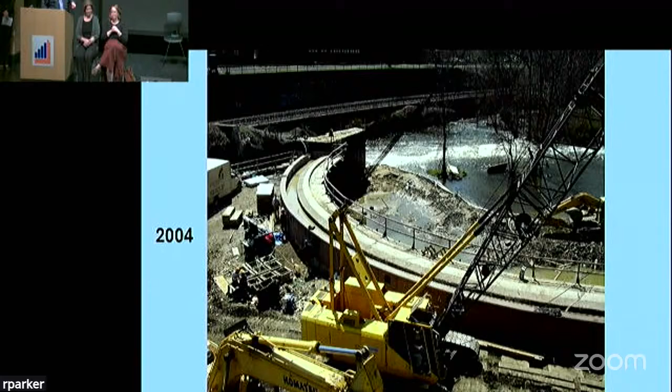This is not working, Rand. Monroe Falls, anyone from Monroe Falls? Mayor's here, thank you. So Summit County, Monroe Falls, and Ohio EPA partnered to get this structure out.

Initially, it was only supposed to be removed half, and there was going to be a fish way to go around it. Well, the good thing was - and I don't know if it was good or not, it was good for us - the river dropped down into the historic channel it was in 200 years before that structure was first constructed. The mayor at the time was not very happy because he thought he'd still have his dam pool, and he said, you might as well take the whole thing out. I'm like, okay. So we had to go back to the beginning, but what an achievement.

Now from above Kent through Monroe Falls we have businesses that allow people to be on that river enjoying a healthy, clean Cuyahoga River. That's pretty amazing. Up, up, up.

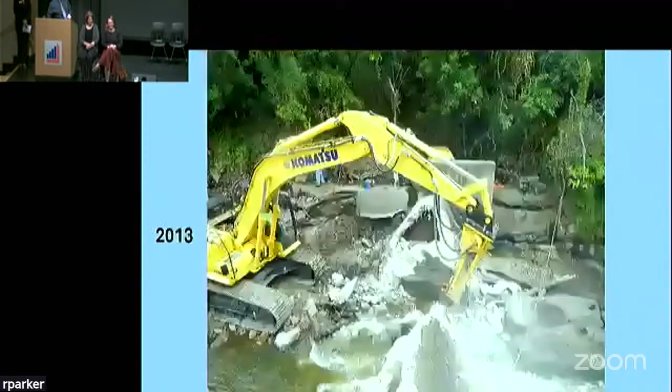Go back one, Ramsey, please - Cuyahoga Falls. Who walked and saw some of that? That was cool, wasn't it? The dam cam was the bomb. So we are hopefully going to have a dam cam somewhere because we've all talked about that. That was crucial to this project going forward - in fact, that might have been the most important part of the Cuyahoga Gorge project.

But we had two structures that were removed, and look what happened. We started in 2013, and by 2016 we now have recreation celebrating a free-flowing river, albeit a little more challenging than you'd normally have for a canoe ride. It's another opportunity on the Cuyahoga River, which is a water trail.

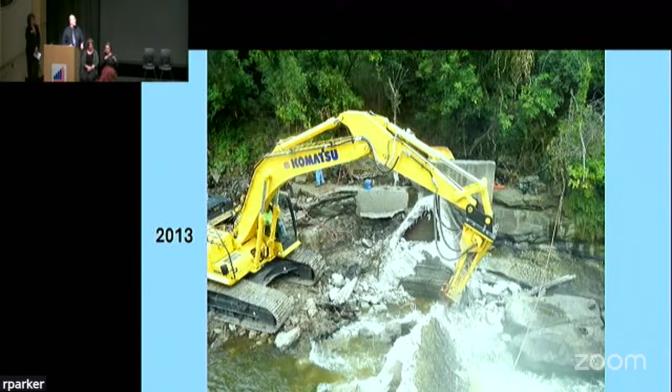The Canal Diversion Dam - COVID did not stop this. So Friends of the Crooked River, raise your hands. Thank you so much. This group took on project management. Now, I must admit, it was probably my fault selling it to them that it wouldn't be that hard.

I think they would disagree at this point. However, what a collaboration - a group of citizens wanting a cleaner Cuyahoga, managing a project funded and sponsored by the federal government, the state government, and the city of Akron. Now this section of river in our new water quality standards is being upgraded from our normal, which we call warm water habitat, to exceptional. That means it's going to hang with the cool kids like the Grand River in being that good, because of recovery.

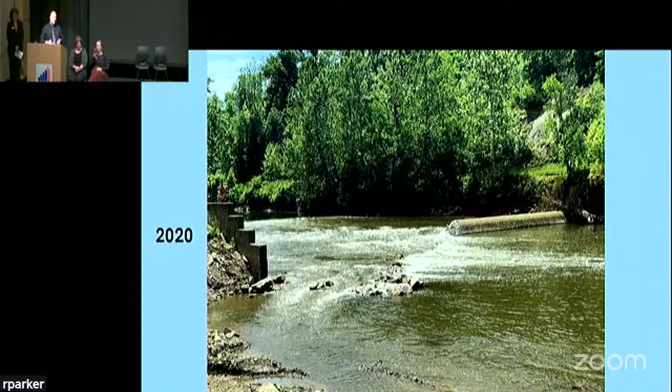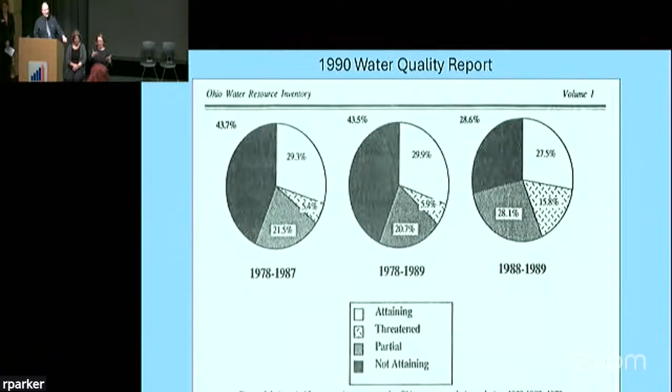Oh, Ramsey, go back one more. Okay, go forward one more.

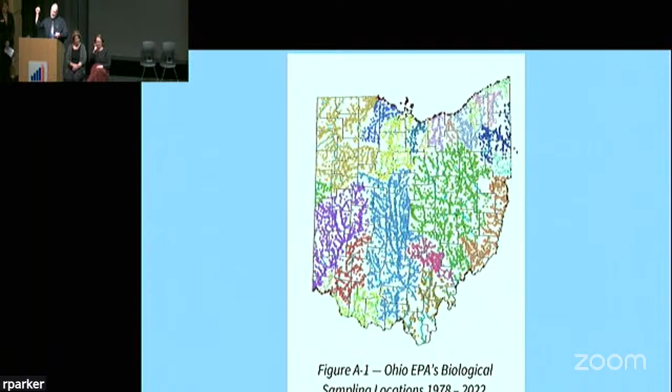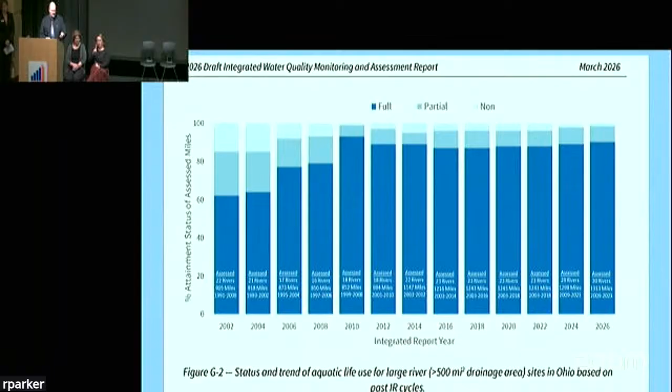So let's look at a longer story - go back at the large rivers. Look how much they have improved. What we're seeing in the large rivers is dramatic improvement because we're making things better: chemistry, dam removals. These are streams over 500 square miles of drainage - the Cuyahoga River in its entirety is over 500 square miles, and at the point of the Gorge Dam, that river is 336 miles of drainage. If we look at the smaller streams, what it basically says is our smaller streams are getting better, but not at the same rate as our large streams.

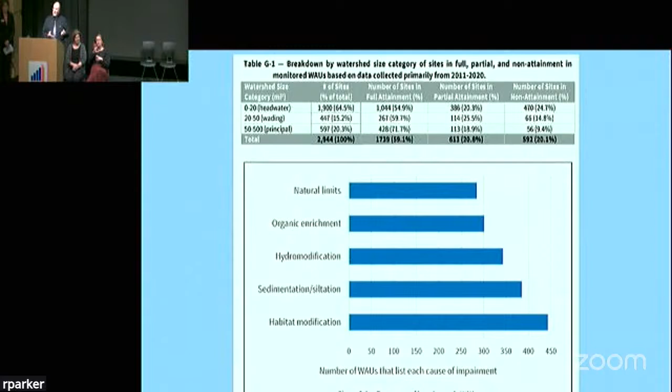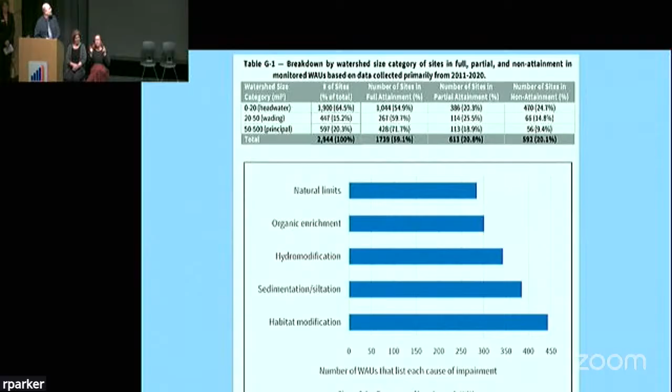And why is that? Habitat modification. Included in habitat modification are dams. So what we're going to talk about today is it's happening, and we're going to go forward and look to what we're going to have. So I am done. Boom. You're up.

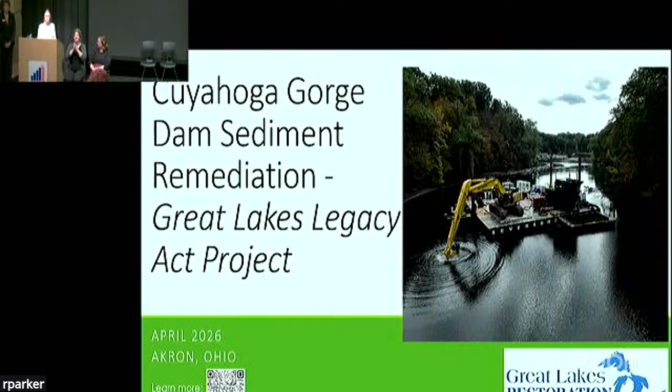And as Bill went over, the benefits of having the dam removed are obvious.

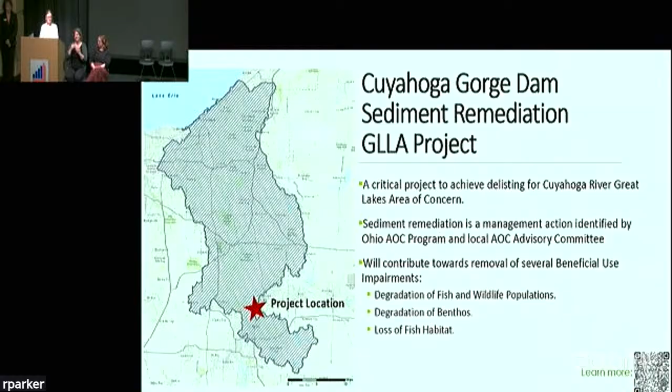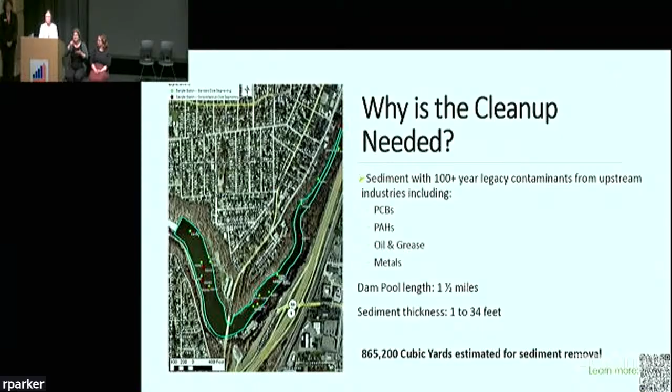Once the group came together and decided that before we can remove the dam, we need to remove this sediment, there needed to be some sampling done. So in different phases of the project design, the remedial investigation, they went out and sampled different areas within the dam pool to identify whether or not contaminants were present, and then once identified that they were present, what was the extent or area they were located in.

The dam pool goes from the dam itself up through upstream areas. The area being dredged is about 1.5 miles. It goes up to, if folks know where the American Legion is in Cuyahoga Falls, that's the land side point of where the dredging will occur.

So the sampling identified where exactly the dredging would need to take place, and the sediment samples also identified what types of contaminants were present - that's where they identified the PCBs, the PAHs, oil and grease, as well as heavy metals.

It's really important to mention the contaminant levels present within the dam pool are low-level contaminants. That's fortunate because there are other regulatory programs that come into play when there are higher contaminant levels - you have TSCA and RCRA regulatory programs that can cost more money and more time. So it's really beneficial that while contaminants are present, they're at least at lower levels. They still need to be properly handled and disposed of properly, and that's what we're going to be discussing today.

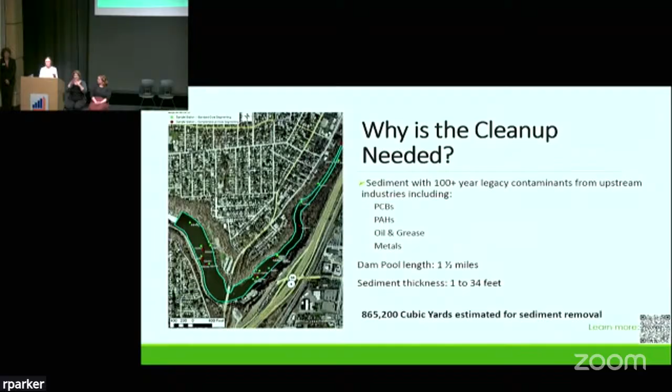Just a couple other things to note about the dam pool itself: throughout it there's varying levels of water present as well as sediment present. The actual sediment that needs to be dredged varies anywhere between 1 to 34 feet, and there's nearly 900,000 cubic yards that needs to be dredged. This has been quoted in the past, so hopefully it's correct: that volume is about 13 football fields filled to the goalposts. So it's a lot of sediment.

Just following along here. Yeah, thanks, Ramsey.

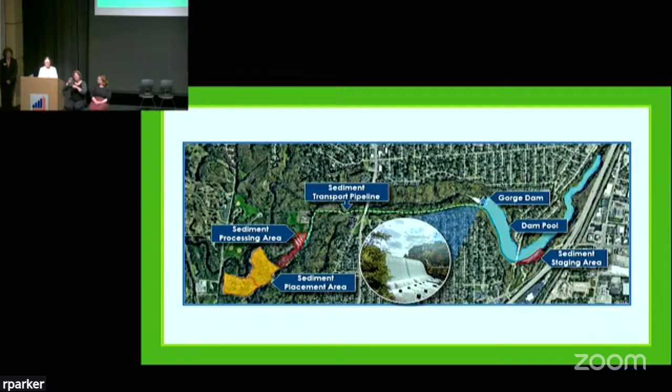It's important to mention this project wouldn't be here, I think it's been said a couple times from the previous presenters, without the efforts from local, state, and federal partners. A lot of meetings, planning, design, and tough conversations needed to be had to make it to today, to be able to celebrate the progress being made. The overall construction contract award was just over $130 million. It's a big dollar sign, but that was a lot of sediment, so they go hand in hand.

This project is funded through the Great Lakes Restoration Initiative. That's the federal portion. But the non-federal sponsors, or our partners, they also provided contributions.

Underneath the Great Lakes Legacy Act, going back to that area of concern I had mentioned, there's a Great Lakes Legacy Act program. In order for a project to qualify, it needs to be within the area of concern. Underneath that act, we have project agreements with the non-federal sponsors listed here: Ohio EPA, City of Akron, Northeast Ohio Regional Sewer District, as well as First Energy Ohio Edison. They are signatories of that project agreement and have agreed to provide cash and in-kind contributions that make this project possible.

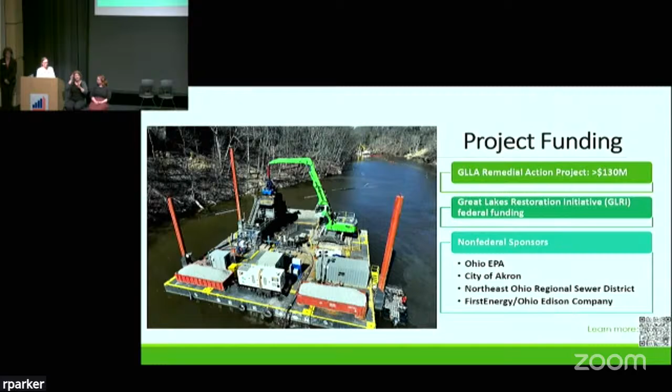Just key emphasis on the partners - we wouldn't be here if it wasn't for the local, state, and industry partners coming together to make this project happen. There are other partners we work with, including Summit Metro Parks, that have supported this project throughout the years and continue to do so, as well as Ohio Lake Erie Commission, the City of Cuyahoga Falls, and Summit County, who have all provided either cash or in-kind contributions. We also have the U.S. Army Corps of Engineers supporting the project. So lots of folks involved in order to get the project where it is today.

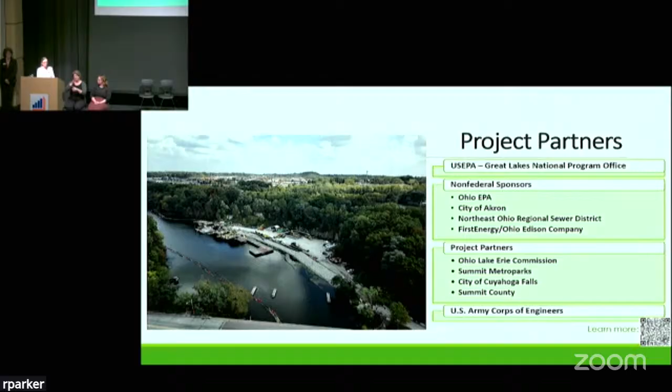This slide is just showing - feel free to take a picture of the QR codes on there. We have a link to the Cuyahoga River area of concern, as well as a link to the EPA Cuyahoga Gorge Dam website. We post pictures regularly with status updates on what's occurring on site.

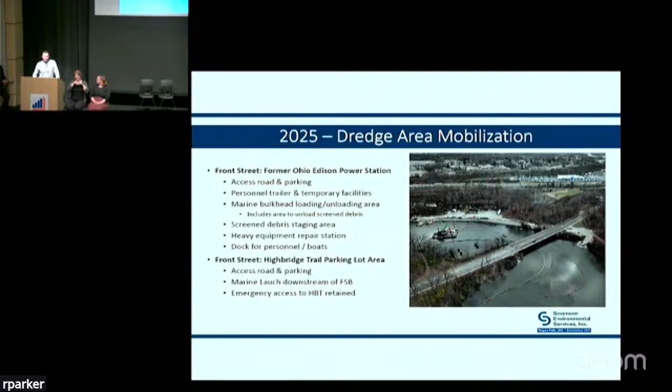On the other side, a much smaller area is the High Bridge Trail parking lot. High Bridge Trail extends right off of that, so we made sure to leave that access open for emergencies, park personnel, dam personnel, and First Energy for the power lines there. That was important, working with the project partners on that, and then mainly just parking in that area. You can see the ramp down to the river. The Front Street Bridge doesn't have enough height for us to get our big equipment through, so any work upstream of the bridge was all launched through that little ramp.

Pretty similar infrastructure down at the Peck Road site - parking, access roads, we brought in some stone. We used some of Heather's shale that she has plenty of, which was helpful. There's another mechanics work shed, another couple trailers for our offices, and our break trailer for personnel.

Right here is the water storage and treatment area. Adjacent to that, where there's a bit more water and a bigger area, is where all the dredge sediment that gets mixed with Portland cement gets pumped to when it comes from the river. Adjacent to that is the area where we store our Portland cement, where it gets stabilized into the sediment, and then trucked out into the placement cells, which are the grass areas out there.

Just wanted to mention, you can't see it on the screen, but off to the right of our staging area is the Indian signal tree. We put up safety fence around that - I know we got a question about it last year - it's still in good condition. We're never back there with any equipment, so it's still doing great.

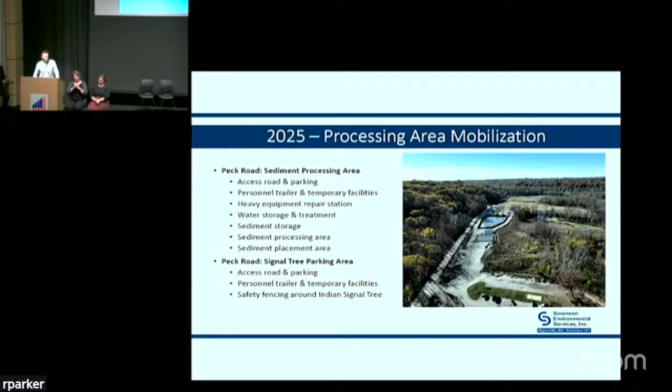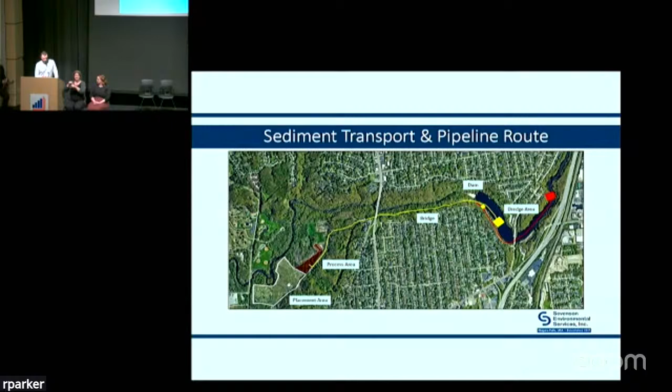This is the figure that Courtney just showed as well, just reviewing the dredge area, the pipeline down through High Bridge Trail. I'll talk about the bridge in a second, then the processing and placement areas. So again, just an overview before we get into a breakdown of each area.

High Bridge Trail is where all the dredge pipe is. We had a specialty contractor come in who basically only welds pipe - over 60,000 linear feet of pipe needed to be welded. We could do it ourselves, but it's a lot of pipe, so we brought them in and they were there for almost a month and a half, welding, certifying every weld, making sure nothing leaks. We did a bunch of leak tests. This was one of the more involved aspects of the project, getting this pipeline installed.

Anyone familiar with High Bridge Trail knows it's just a walking and hiking trail, so getting any heavy equipment in there is very difficult. Mix that in with the Chuckery Race in the area, the overhead power lines, the utility poles, and the dam - it was difficult. It took us almost two months from start to finish to get the pipe in and get the bridge in, which I'll show in a minute.

We had to use some specialty smaller equipment - wanted to mention this, it's called the Morooka truck. What it does is drive forward down the trail, and we literally just drag the pipe with it. When we're done, the cab of the truck spins 180 degrees so you can drive straight out. The cliff there is pretty dangerous, so we didn't want to back up and down that trail a hundred times. That worked out pretty well.

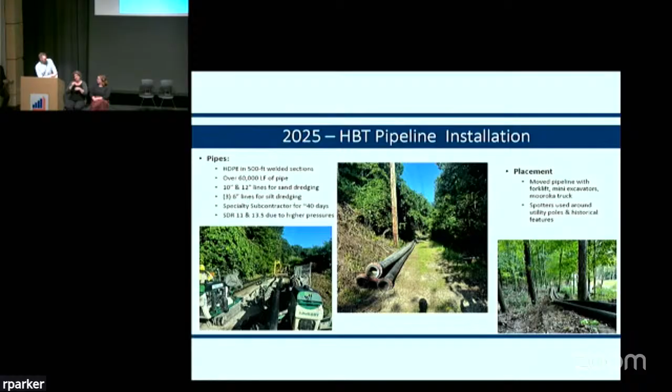Anyone familiar with the area knows there's about a 170 to 200-foot gap where there's a big ravine we had to span for our dredge pipes. We couldn't just fill in the area due to drainage and all the historical features, so we had a couple different ideas. There's a wooden walkway there that we were thinking about rebuilding. We actually brought in a couple local contractors to take a look at it, and they wanted absolutely nothing to do with it.

Some of our crazier ideas were anchors and cables, literally driving anchors into the uphill slope, securing cable to them and tying them to a couple trees to kind of float the pipe over. I don't think SMP really liked that idea, so we didn't go with that. Sheet pile was an idea, but what we ended up going with was a self-cantilever bridge, which we were able to get back there in 20-foot sections.

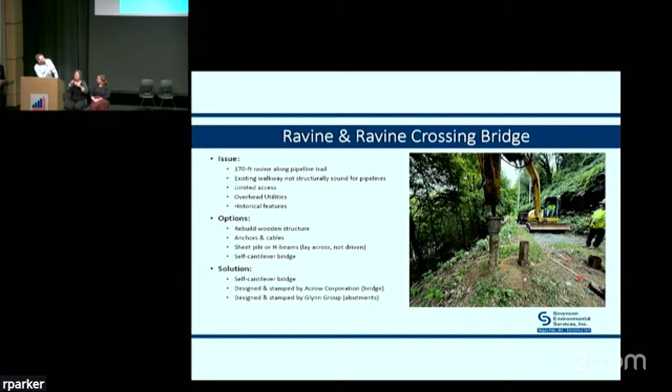It was designed by Acrow Corporation, who designed the bridge, and then we had to design the abutments as well. The Glynn Group, who we work with in Buffalo, New York, does a lot of our geotechnical engineering and actually designed the abutments. The only disturbance we did was drive pipe pile into the ground for the abutments. Those were driven into bedrock about 10 feet, and we placed crane mats on top of them for the bridge to sit on. I have a bunch of pictures.

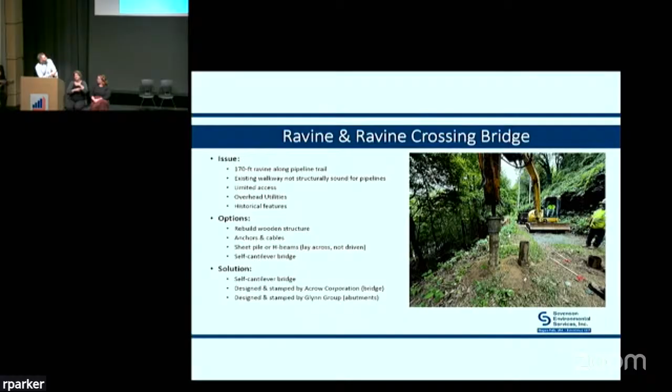The bridge itself was about 170 feet long, 10.5 feet wide total. The walkway is about 5 feet or so. You can see the bridge sat on rollers when we were installing it, and then we literally just pushed it out into the ravine, and the counterweight of the bridge itself offset it when it was pushed out. We had to build it in 20-foot sections, again just because of the access, bringing piece by piece back there.

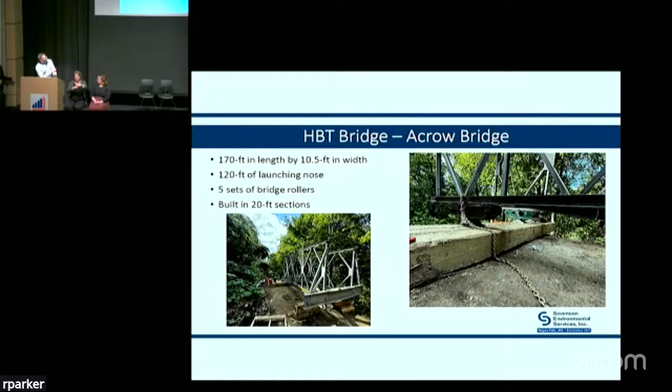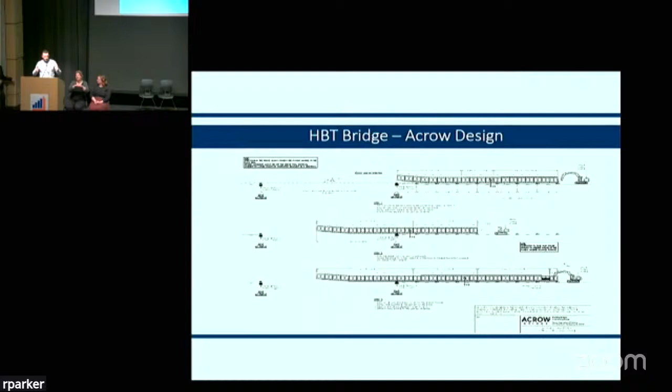Here are a couple pictures, you can go through these pretty quickly. On the left, this is us literally building it by hand, every nut and bolt screwed in by hand. On the right here, this is the cliff right here, the Chuckery Race was right here, so not a whole lot of room. We brought in a little stone to level the area, and you can see the utility pole on the other side - so kind of jammed in there.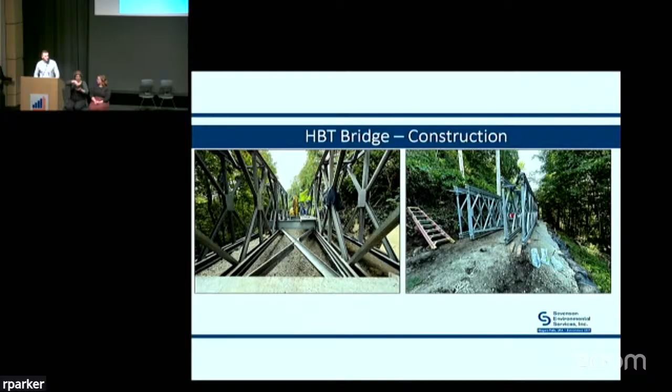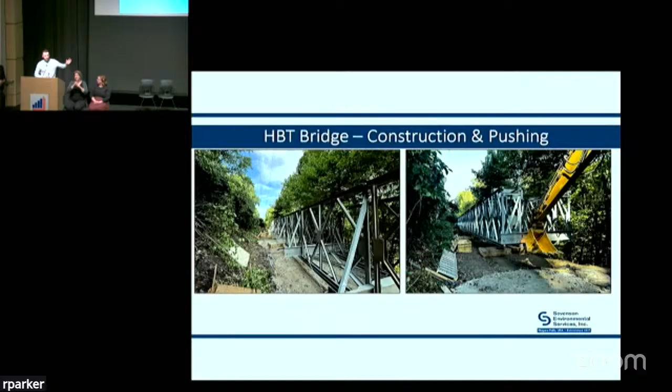We have built these bridges before, but usually with a big crane that just comes in and sets it right in. We couldn't do that with all the obstructions. Here are a couple more pictures of just building it - this is the other side, the uphill side, a little bit more room but still pretty tight. And here's our excavator literally pushing it out over the edge. So build 20 feet, push, build 20 feet, push, until it reached the other side.

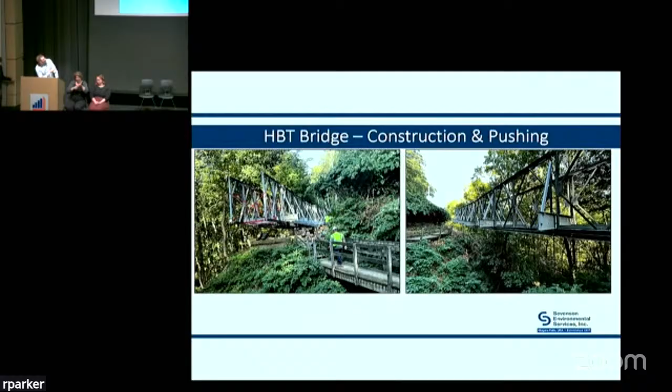Here's just a couple more - you can kind of see that launching nose angled up a little bit. Here it is going out over the ravine. This is the old walkway that I was talking about. And then here it is about to be landed on the other side. This was that other abutment that we installed the same way.

One other thing we had to do on the right side here was chip out just a little bit of existing rock just to make it fit. The height wasn't going to fit, and the width wasn't going to fit either if we didn't chip just a little bit of the existing rock. So we got that out and made sure everything was lined up correctly.

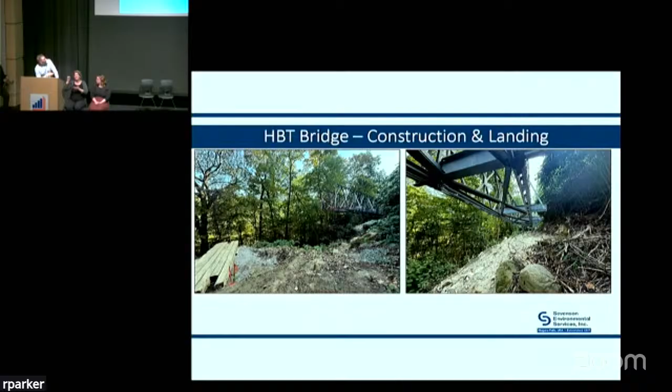Here it is landing on the other side again. This side was a little bit lower than the other side, so we made it level by placing a couple more crane mats. This picture on the left looks a little bit more dangerous than it is - we had a spotter keeping an eye on everyone, but we had to take it off exactly how we installed it. Once it hit the other side, take 20 feet off, push, 20 feet off, push. We landed right next to this utility pole.

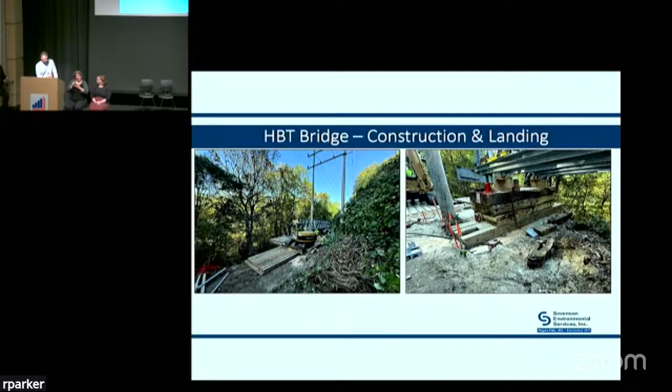This install of the bridge took us about 2.5 weeks. We were figuring more like 1.5 weeks, so it took us a little longer, but it was safely installed. Once it was in, on the right side here, we put in mats for walking, a little safety fence, and then you can see the dredge pipe being installed after everything was in.

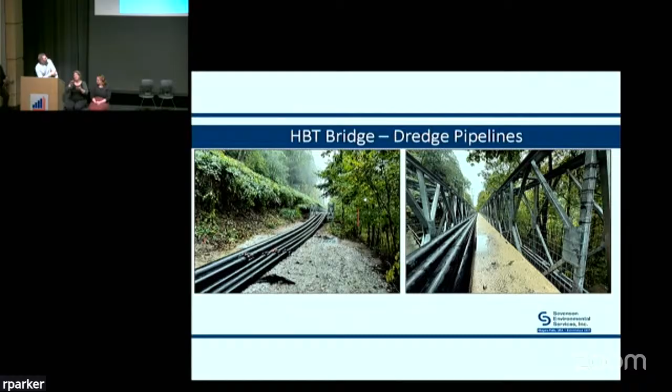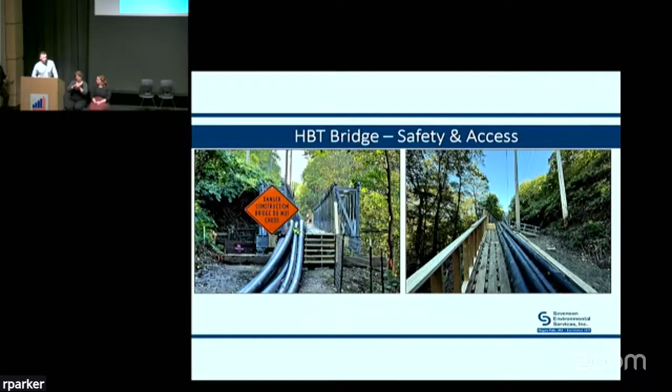And then just a couple safety signs, some stairs to get up onto the platform, and then a ramp on the other side since it was a lot steeper. The pipes were secured to one side so they wouldn't be moving around. I believe, yeah, one more picture of it from up above.

So yeah, one of the cooler things I've been a part of with this industry. It was very difficult - it took us about 2.5 weeks, and we're actually working with SMP to hopefully leave it there long term if everything works out. They have a new walkway for their trail, but we're continuing to work with everyone on that.

There's some augers in there, it gets mixed up. We're trying to add as little water as possible because on the back end, when you mix it with Portland cement, any water in there just damages the strength. So it's a little bit of a double-edged sword trying to get it to pump 2.5 miles, but also keeping as much water out of it as possible.

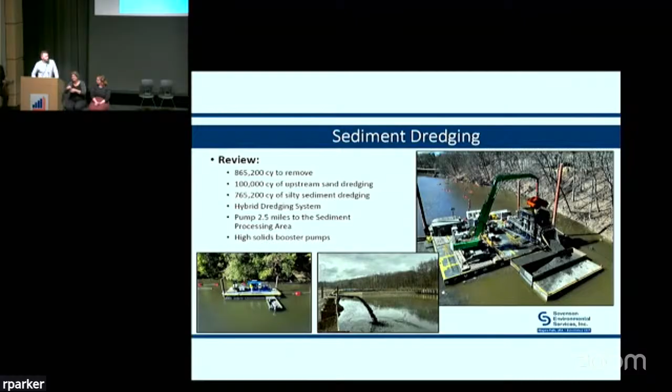All right, so what we did last year in the fall, starting with the sand, we separate them between the sand and the silt. The sand has a little bit smaller excavator dredging - it's the PC 800 Komatsu excavator.

We were able to complete about 7,500 cubic yards last year - a little less than what we wanted to in 2025, but we had to work around a rock slide that occurred in January 2025. It actually tumbled into the river a little bit, so working our way around there and dredging in that area to try not to increase the rock slide anymore slowed us down a little bit, but we were able to get past it and get up there and start dredging in the shallower area.

So you can see us loading in some sand here. This sand gets separated out separately from what's getting mixed with Portland cement currently. So adding water to this system is okay and actually helps get some of the sand into the system.

100,000 yards of this sand upriver is scheduled to be completed by the end of this year. Again, we're working our way downstream to upstream just because of how shallow it is in the area, so we have to dig our way in, get some draft, and then come back out and clean everything up.

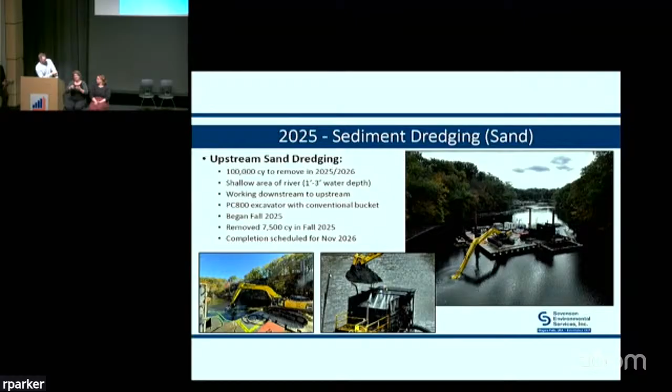So on to the silt side, in 2025 we were able to complete almost 9,000 cubic yards. We started after the sand system, so a little bigger equipment, a little bigger bucket - we were able to move a little bit more material last year. These green machines are just excavators, but we call them Sennebogens.

So last year we only had one of them dredging. This year, two of them are dredging - one's upstream of the bridge and one's downstream of the bridge. And this is scheduled to be completed at the end of next year.

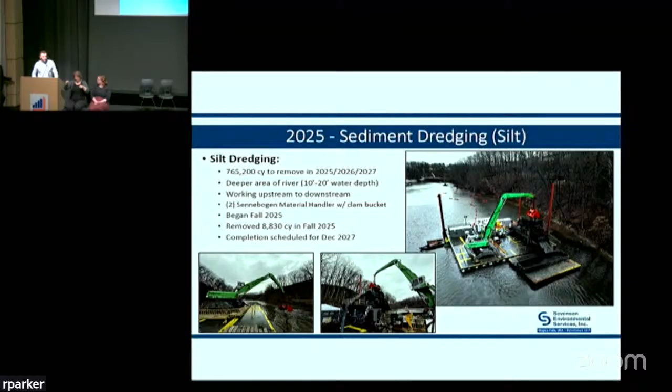All right, so what did we learn from dredging 16,000 or so yards last year? Biggest thing with the dredging is the debris. There is a ton of it. Mayor, we haven't found your bike from last year yet, but there is a lot of sticks, twigs, and leaves.

So if you see that middle picture there, that's a picture of some of the debris that came off the screen, and the leaf matting is just decomposed over years and years, and there's actually sediment mixed in with it. So there's clay, there's silt, just stuck to it, and it's hard to get it to separate, which is what we want. The way to do that is to just blast it with water. But again, we're trying not to add water, so that makes it a little difficult.

But we brought in what's called an ALLU shredding bucket, which is this top right photo here in the red. And it takes all that debris and just shreds it down to less than an inch. So it kind of slurries it a little bit before we put it into our system. We tried a couple buckets of it earlier this year, and it would just clog up our pipe and pump. So the ALLU bucket's really helping.

So we're setting up now to be able to do that full time. Once it's shredded, we're able to send it to that sand system I just talked about, as those pumps are a little bigger than the silt pumps. And there's another impeller in there that actually shreds it up even further. So any debris that comes off of any dredges now is getting sent back up to the sand barge, and that's just a lot cleaner, easier way to get it down to the sediment processing area.

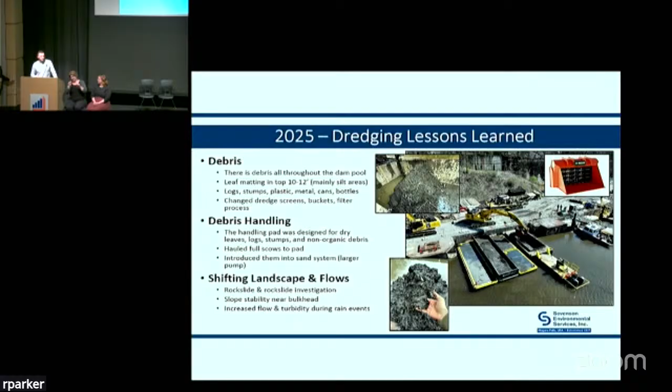And then finally, just something we noticed was just how fast the river can move when there's a lot of rain, and we've got a lot of rain this year. So just keeping an eye again on our guys' safety. We're monitoring all the turbidity. So turbidity seems to increase during rain events. So just keeping an eye on that during our quality control checks and making sure we're able to continue dredging.

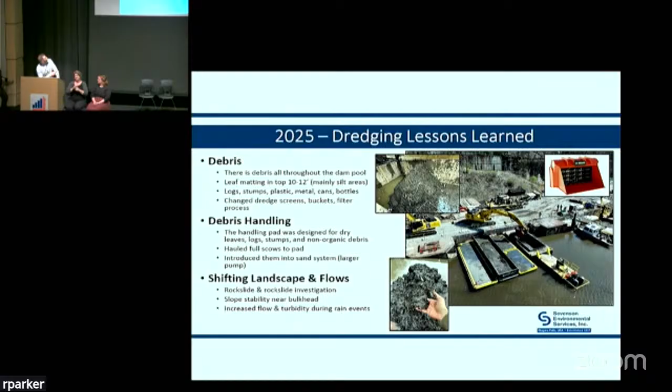All right, so that was last year. This year, with the sand dredging, we've already removed 6,000 cubic yards in the last month and a half. We did change to a larger debris screen to try and filter through some of that shredded debris that I was talking about. So that is helping. And then, still targeting the 100,000 cubic yards this year.

So as you can see, this was taken maybe a week ago. The rock slide is right in this area. So we're up past it now. We're really getting up into the shallow area. So the cycle times on the dredging should be a little quicker, should be able to get some better production and get that 100,000 yards completed this year.

For the silt dredging, we've already done about 20,000 cubic yards with just one machine. The second machine started last week. So we changed to a smaller clamshell bucket. And we haven't seen any reductions in production, which is good. We noticed when we had a bigger bucket on and just dropping all that debris onto our dredge screen, it would just clog up immediately. So trying to slow down the amount of volume that goes on the screen seems to be filtering through better and helping us with the uptime production.

We modified the layout of number 2 just a little bit based on a couple of things from last year, but we're targeting about 400,000 cubic yards between both machines for the silt dredging. That's upstream and downstream of Front Street Bridge, and that comes out to about 1,000 cubic yards a day with each machine, so 2,000 cubic yards per day, which is a lot of volume to move.

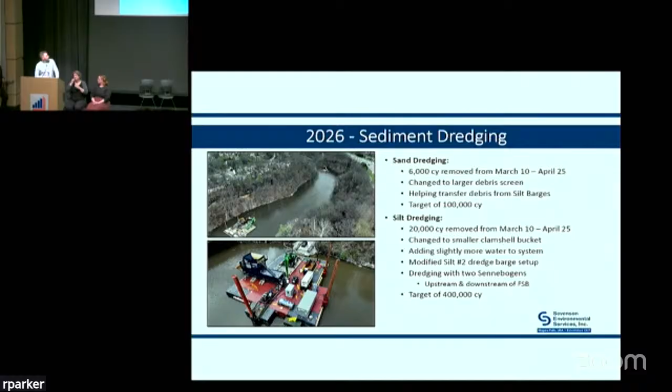All that gets dredged and pumped down to the sediment processing area, discharged into the sediment staging area, or surge basin as we also call it. From there, it gets put into what's called a pug mill. The blue silo stores all the cement, which comes in through an auger extension, mixes in with the sediment, and another auger tank mixes everything up, discharges it down, and it gets hauled out to the placement area.

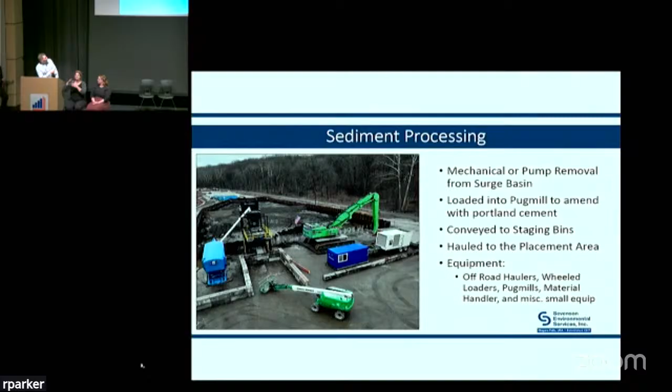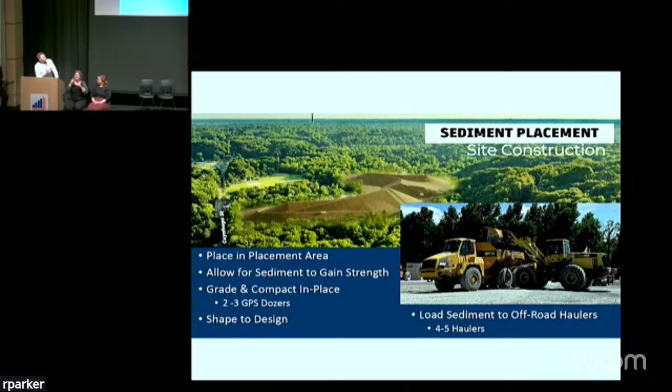Again, going through what we accomplished last year and then getting into this year, we were able to stabilize about 6,000 cubic yards in 2025.

We tested a conveyor pug mill, which was different from that photo I just showed. Obviously conveyors are more open and have a chance for the sediment to spill out the sides. With how wet it's been, we knew that wasn't going to work after testing it last year. So we changed everything over to a confined pug mill system, where it's either chutes or gravity fed instead of running it along a conveyor and having everything spill. Everything's more confined. So we learned that last year.

We were targeting about 12% Portland dosage by weight into the sediment last year. That was during no active dredging. We were able to dry out the sediment a little more during active dredging as we continue to pump water and sediment into the basin, and the percent solids and moisture content rises. So we were targeting 12% last year.

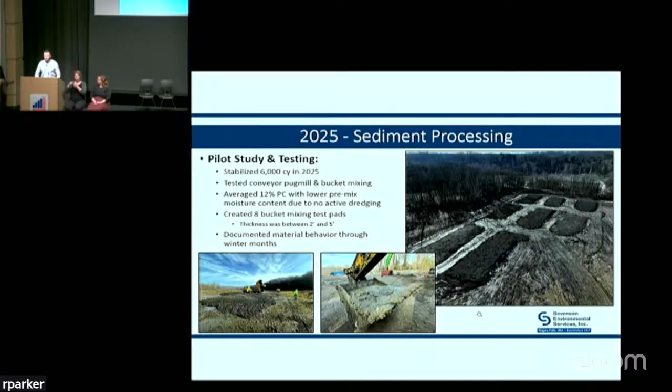We were able to create these 8 test plot areas, ranging between 2 and 5 feet thick, and we learned how it was going to react over the winter. Portland cement likes warmer temperatures to cure and set up with the sediment, so we got that done this winter and monitored how it was performing. These pictures show us dumping it out in the field, and you can see after it was mixed with Portland how thick it was. We grabbed some samples out of there to test the strength of it.

So lessons learned with 2025 sediment processing is all about moisture. There was debris with the dredging and moisture on the processing side, just trying to get as much water out of the system as we can after pumping it 2.5 miles. The moisture content ranged from 185 to 200%.

So we made a change to the surge basin here. We added this berm into the system, which keeps sediment down closer to the pug mill processing area. This allows it to drop out while the water can flow off the back into this smaller pit, and from there we pump it into our water treatment plant. Again, we're just trying anything we can to get as much moisture out of the sediment before it's introduced to the Portland.

We talked about the enclosed Pug Mill mixing and then transportation. As Courtney mentioned, it's an old dumping site. There's debris everywhere down here as well. There's soft spots, and the rain hasn't helped. So it's been tough to try and truck it out to the placement areas.

So we tested a pump last week to just pump it from the moment it gets injected with Portland out to the placement cell. That test went well last week. So we're moving ahead to get a more permanent pump out here to be able to pump that along with truck it, so we have the option to do either.

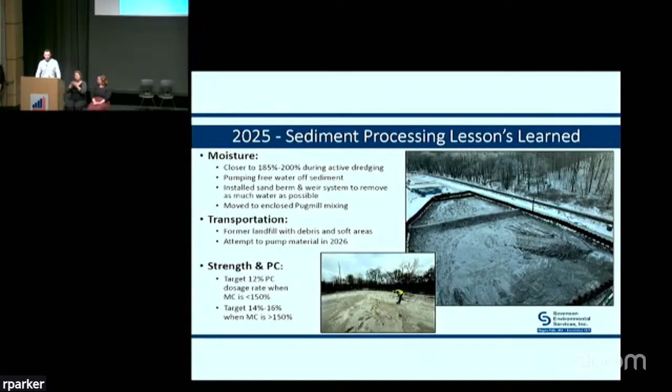This year we have also already stabilized 6,500 cubic yards in the last month. We're still in the pilot study, so again, as I mentioned, we're just constantly learning more about the moisture, more about the Portland dosage.

So we've dredged 20,000 yards, so a lot of it's still in that basin. And we're targeting 30,000 for a pilot study. Once we get that completed, we could talk with EPA, the project engineer, and come up with the final game plan to move forward with stabilizing the rest of the cubic yardage. But that should be completed in about a month or so, and we'll have a lot of good data with all the Portland and strength by then.

The production down here is scheduled to start after the pilot's done, so hoping to roll right into that. It goes until really the cold weather sets in, so hopefully Christmas if we're lucky. But there are some temperature restrictions on the stabilization. As I mentioned, Portland doesn't like the cold weather.

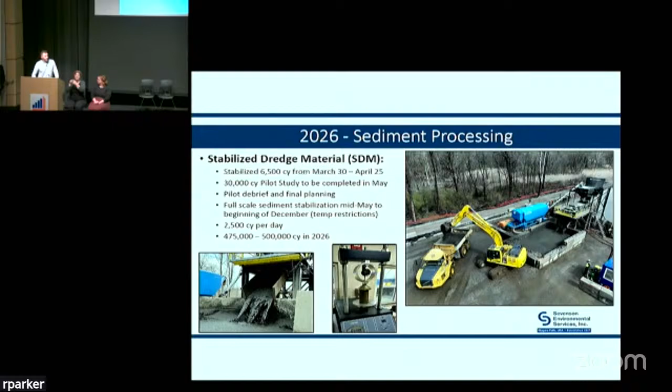So we're targeting 500,000 cubic yards this year. That's about 2,500 cubic yards a day, a little bit more than the dredging, to be able to keep up with that material in the basin. So yeah, that's the goal this year, and then obviously finish the rest in '27, '28.

All right, so some of the work monitoring, quality control - I think I shared the same or a similar slide last year, but just wanted to touch on the continued coordination with local stakeholders, our infrastructure monitoring plan. So we're just monitoring everything on the site: the Front Street Bridge, the dam itself, the bulkhead, some utilities we're monitoring, the Chuckery Race. There's a lot of them.

So everything's installed now. We actually got some pretty good data over the winter on the Front Street Bridge. Talking with Summit County engineers, we actually installed a couple more monitors. So nothing's moving or anything, but just to be cautious, we added a couple more monitors. So again, just working with local stakeholders and trying to get the best data that we can.

All our equipment out on the water has GPS capabilities, so the operators at all times know where their bucket is, what elevation they're at, what elevation they need to get to finish dredging. All that's tracked on a computer right in the cab of their machine, so they know exactly where they're digging. So we compare that with the hydrographic survey - here's a picture of our survey boat. That kind of quality controls what our GPS is saying, because obviously GPS isn't 100% accurate all the time.

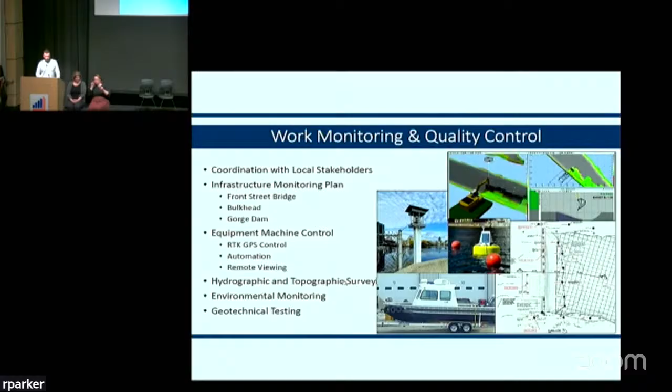All right, schedule. So we completed mobilization last year. Everything's set up. We began dredging and system shakeout as we went through in the fall of last year. And now it is time for the full production dredging with 3 operations, so that will be ongoing all this year, all of next year. The goal is to complete dredging December 2027.

Pending any additional dredging, which may be anything that flowed in from upstream, or if there's a little fluff layer left at the bottom that we have to get, but we should be done by the end of next year. And then all of 2028 to finish the placement area, make sure that's all graded, get it covered.

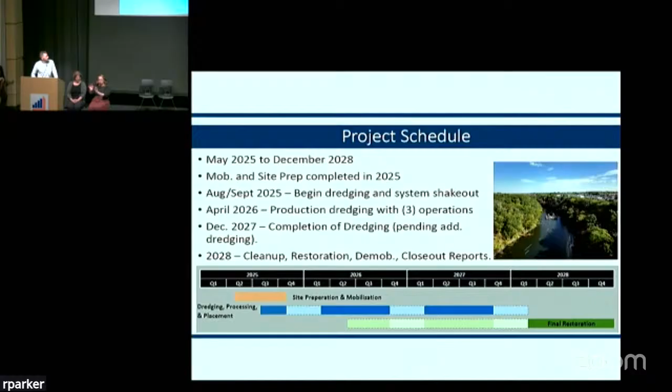Courtney mentioned the native seed. Get that established with the cover crop and make sure everything's growing, no erosion, stuff like that. All of 2028 and hopefully out of here at the end.

Work hours, public impact. So work hours are 12 hours a day, 6 days a week. Sundays are reserved for maintenance, so we have some small crews come and fix the equipment, do some services, stuff like that, so we can continue to run and stay on schedule.

We mentioned the dredging between March and December with the winter shutdown due to the Portland cement. So this year it was January to March, just with the temperatures. So probably plan on that again this year.

And then some of the other monitoring that we're doing - air monitoring, dust mitigation - we haven't had any issues with dust so far, which is good. But we have a full-time water truck on the site to wet down the roads if there is any issue with dust. And odor hasn't been an issue at all either. We had that on here from last year, but to date, there's been no issues with odor.

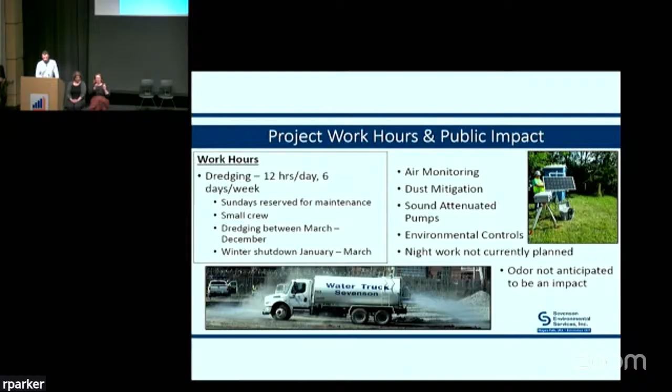All right, last slide. I think we mentioned it a bunch, but again, wouldn't be here without the project partners. So obviously the US EPA, but City of Akron, Cuyahoga Falls, Ohio EPA, SMP, First Energy, Ohio Lake Erie Commission - they've all been great to work with. They obviously want to see the project succeed, and so do we. So that team has been working great together.

There's been, and continues to be, site visits from everyone, future planning for future work. We talked about the protection of the local resources, the Chuckery, some trees in the area, so just continuing to work with them. We have weekly meetings to make sure everything's in line. So yeah, wouldn't be here without them today. Appreciate all their help.

And then just wanted to touch on the community. That's why everyone's here today. Hopefully long term, we're leaving the community in a better spot than when we got here. But while we are here, trying to be involved as much as we can and make any small impact on the community we can. We hire 25 to 30 local union employees, so they have also been great to work with. We might hire a couple more here as we continue to ramp up into full production.

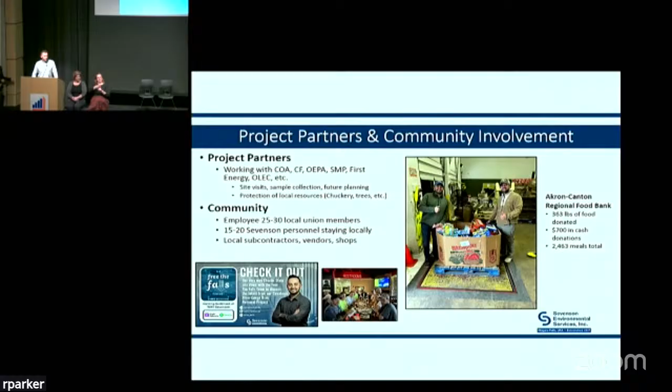Like I said, we're only here for short term, but we hope to leave an impact while we're here and as we're gone. So thank you. I appreciate the time, and we'll get the project finished up in a couple of years here.

Thank you, Charlie and Courtney and Bill. Don't we have amazing people working on this project? Yeah.

Okay. All right, so some general updates. Here you can see kind of what the plans are for keeping in touch and so forth.

Also wanted to show kind of our thoughts on closures and so forth. Sorry, I didn't really think about talking through this with you, but at this point, of course, the Chuckery area is closed. Gorge Metro Park is open. The Oxbow area of Cascade Valley is open. The plan is to not have to close Gorge Metro Park, although we are closing portions of the trail as we work on it. So there will always be updates on our website for that.

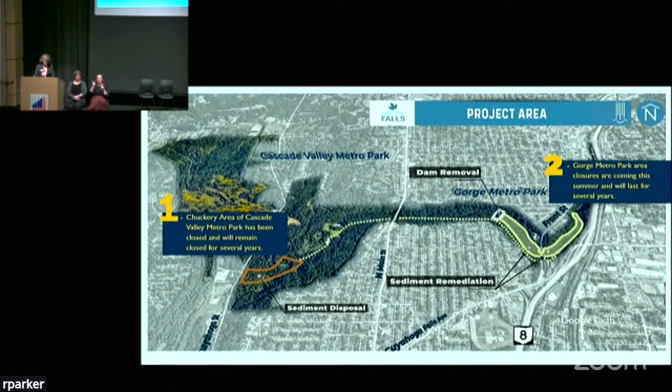Let's see. There we go. Got it. And I have one more.

Next up, I would like to introduce Dr. Megan Schaefer. She's Summit Metro Park's Cultural Resources Supervisor, who will share more about the archaeology work our conservation staff is doing related to this project. Welcome, Megan.

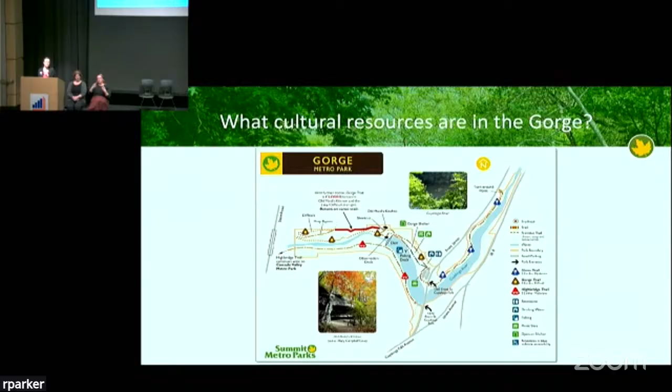The first question is, what historic sites or structures are in Gorge Metro Park? I don't have time to talk about all the cultural resources in the Gorge, so I'll just talk about things that meet a certain set of criteria: historic properties. Historic properties in this context doesn't mean just anything that's older. It's a specific label applied to any pre-contact or historic district sites, buildings, structures, or objects that are eligible for, or already on, the National Register of Historic Places.

This is outlined in the National Historic Preservation Act. So the same way you'd look to see how a project of this nature would affect threatened or endangered plants or animals, we also ask what the effects are on these rarer historic properties as well.

When we started the sediment remediation and dam removal project, we assessed several historic sites and structures throughout the gorge, and 4 met that bar of being considered historic properties, meaning they were eligible for or already on the National Register of Historic Places. Of those 4, only 1 had the potential to be impacted by the project. All the others could be avoided.

The one that could not be avoided was the Chuckery Race, which you've already heard a couple times today. I think Charlie from Sevenson knows that if you say Chuckery Race 3 times in a row, I appear.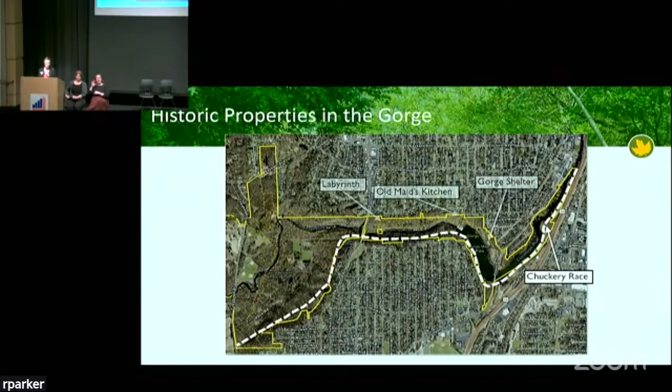It is along the footprint of the High Bridge Trail — a lot of the Chuckery Race is on that footprint. This is the Chuckery Race. It is already on the National Register of Historic Places. It was constructed between 1840 and 1844.

A race is a channel or canal built off of a main waterway that diverts some of the water flow for the purpose of powering mills or machinery. So it's a piece of water infrastructure designed to power industry.

This particular one was designed to power a new city that was going to be called Summit City, which would have been around the area of what's now North Hill, in the southern portion of it. You probably know this because we don't have a town named Summit City — it didn't work, it was not successful.

On opening day, the newspapers reported that the water came slowly, as if it had lost its way. So it wasn't very successful.

Remnants of the race can still be seen today. It's called the Chuckery because of an old joke about Summit City: what's the population of Summit City? 10,000 — one man, and 9,999 woodchucks. So any dads in the audience, if your jokes are legendary enough, they can last for centuries.

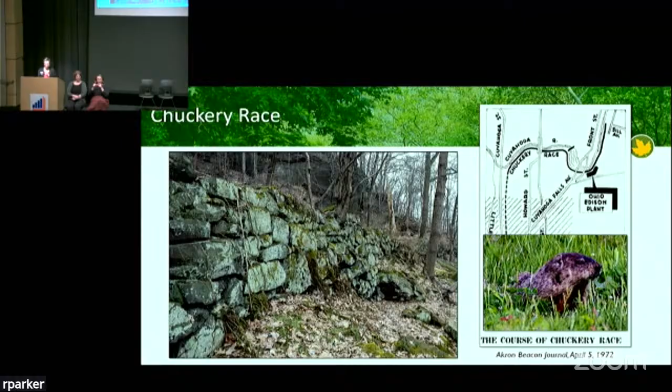How do you protect something that is within the project footprint? This is really smack in the middle of the footprint. We developed a plan for monitoring the resource, for starters.

The first step was doing precise documentation of this resource, which meant photographing it, and we also did 3D photogrammetric modeling of it.

This is very difficult because, as already mentioned, this is a very steep area, and what's left of the Chuckery is on the downslope of the High Bridge Trail. We actually had staff rappelling off the side of the slope taking imagery — not me, I was standing above them going, 'Looks good, you're doing great.'

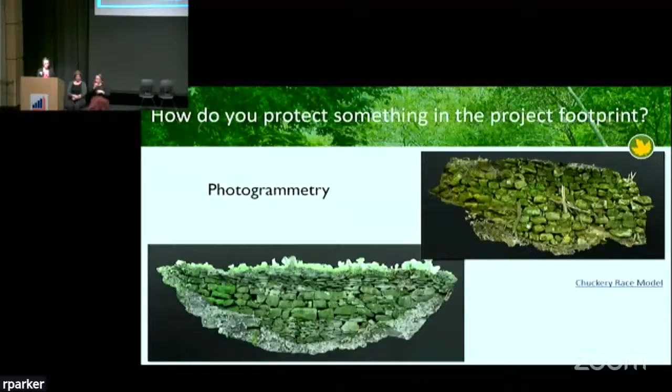That modeling provides accurate imagery of the race remnants still along the High Bridge Trail, so we have a good before picture of the race in case anything does happen to it.

And then during the project, the dredging is actually being monitored by vibration monitors. Thank you to the contractor, Sevenson, for setting those up, as well as cameras, which allow us to keep an eye on the resource as well as the activities that could impact it. So we work with the US EPA and the project contractors to determine what's going on if one of those vibration monitors does go off.

We did actually have this happen early in the project. When they were putting in the new bridge, they were prepping the site for that, and the vibration monitors did go off. I was contacted, we did a site visit, discussed it with US EPA, discussed it with Sevenson, and we were able to work together to determine how to move forward with the project and get completed what needed to be completed without causing any further alerts.

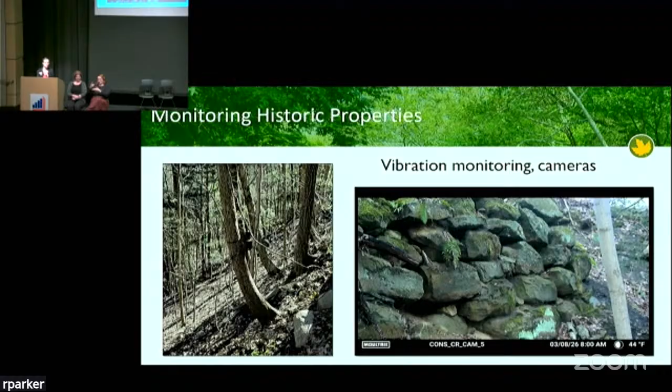This is the biggest question that I get probably: what kind of stuff are you finding? I bet you're finding all kinds of cool things. If you like shoes, plastic trash, golf balls, and pieces of bottle glass, then yes. Most of what we're finding are things that we would not curate in our collection.

But what happens if you find something cool or important or historically significant, or that meets the bar to be considered a historic property? We actually have a conservation plan that we developed in coordination with the State Historic Preservation Office, and we use that in case something turns up that we would want to curate.

So how we approach that curation would depend on what the object is. Some things that have been submerged for a long period of time are notoriously difficult to conserve and curate because they're subject to deterioration as soon as you take them out of water or mud. Other things would probably be too bulky, or we wouldn't be able to curate them because of their size, or it just wouldn't be feasible. There's a possibility that we would share photos of them or do 3D modeling of them, however, to keep a record of these pieces of history, as well as to share them with the public.

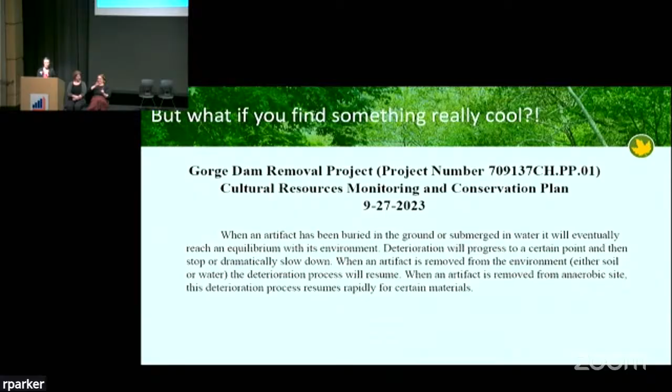So this is another question that we get a lot, which is: what if you find a body? First and foremost, if a person were to be found, the contractor would call the local authorities and Summit Metro Parks Police, who would follow all the local and state laws regarding the discovery and treatment of whatever would be found.

If anything were to be found, I would follow the steps outlined in this plan for assessing whatever is found, contacting tribal nations if we need to do that, protecting what is found, and making sure that US EPA, Sevenson, Summit Metro Parks, and the project partners are all working together to determine how we would be moving forward from that.

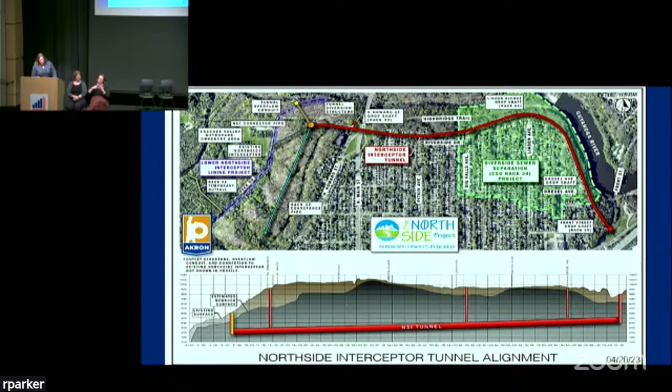I said I was going to keep it simple and high level because we are near the end of our project, so a lot of our work is done. This is the completion of our mainline tunnel, which occurred in November of 2025. Once the tunnel boring machine breaks through, we have a photo op, and it's a very exciting day for us.

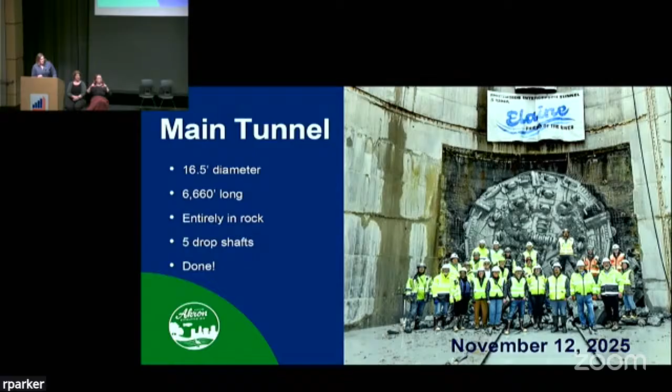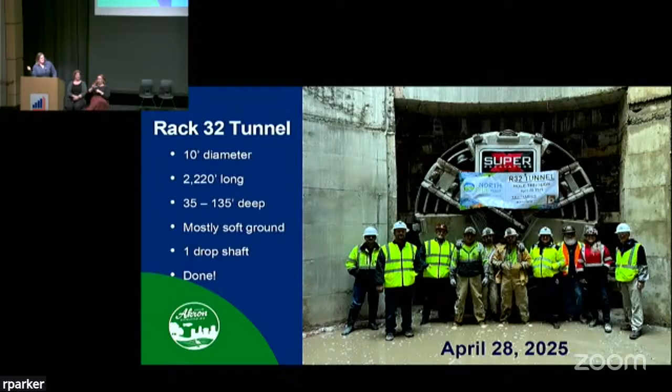Remember I said we had another tunnel - this is our Rack 32 tunnel, and it is complete as well. And then we had another tunnel: this is how our tunnel system drains out to our existing sewer. I said the tunnel system stores flow during an overflow event, but it has to drain back out to the sewer system, and this tunnel serves that purpose.

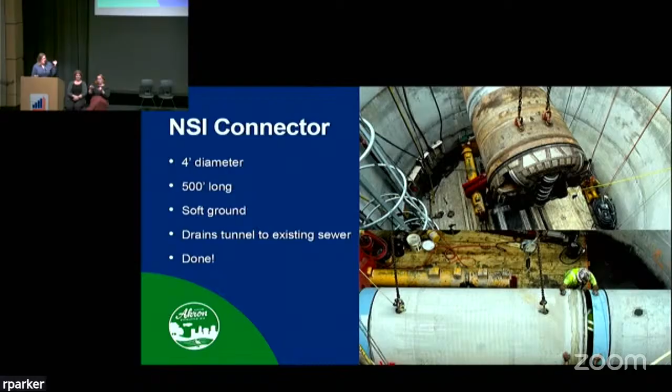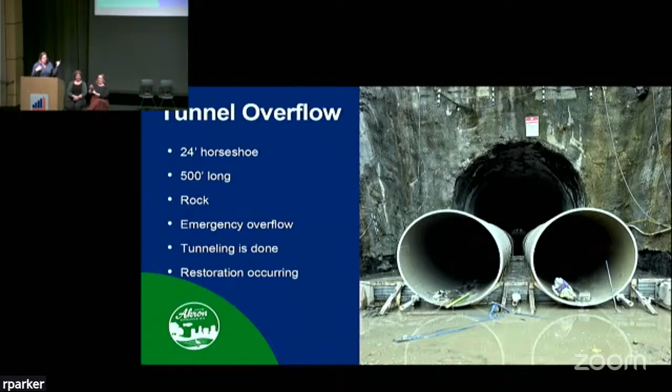The good news is we're consolidating all our overflow locations. We're removing 4 overflow locations, and this will just act as an emergency overflow in those catastrophic storm events.

So what's next? No more tunnels, lots of structural concrete and rebar. We have to abandon the existing sewer in High Bridge Trail, from Front Street to North Main Street. That will be filled with grout. We'll be coordinating with US EPA and Sevenson because that sewer is under where the sediment pumping lines are placed.

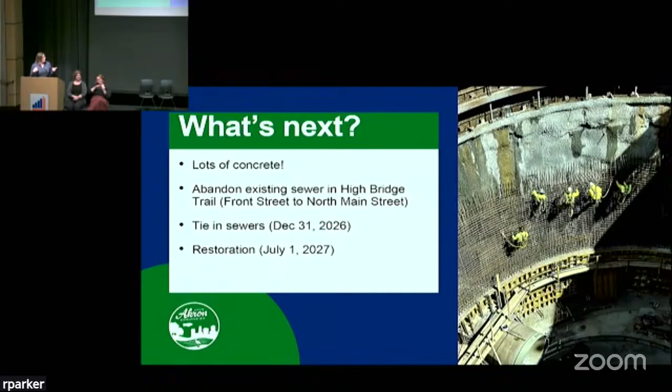And then we'll tie in all of our sewers, and the tunnel will start receiving flow by the end of this year. Our final restoration is due to be complete next July.

And that's it. We do quarterly updates on our website, akronwaterwaysrenew.com. We usually do those seasonally, so check out the website. We have some cool videos if you have more interest in learning about the Northside Interceptor Tunnel project. Thank you.